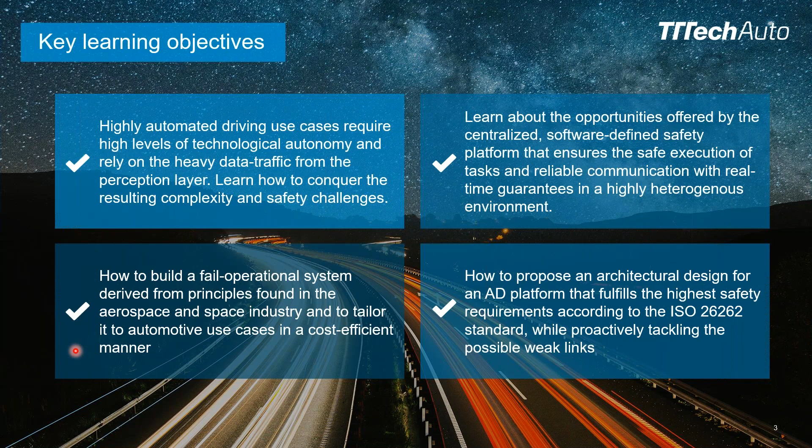So when we look at the automotive industry, and this is one of the slides that I think we have already shared in one of the previous webinars, so I'll just rush through this quickly. It is evolving at high speed, and I've been in the automotive industry for quite a while. There's really a speed going on right now. We are moving from one function, one box, to something like a complex modular design with a lot of services being centralized.

We are also seeing changes in the behavior of the OEMs, that they are cherry picking, they are selecting the best in class solution, and they want to get them from multiple different vendors, and they would not just choose one all-in-one supplier, but they want to have multiple different suppliers available to get the best solution.

And we are increasing the speed of innovation cycles, looking at the enormous complexity that we're putting in there. We are really speeding up the process of getting designs into the field. And of course, this still has to match with the overall timescales of the automotive world. But it is, of course, a race, and there is a competition going on here to be the first one to provide a safe and stable solution with a large customer value.

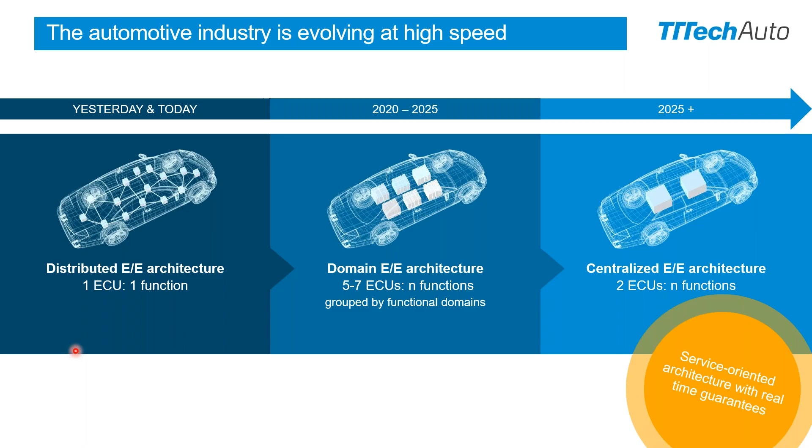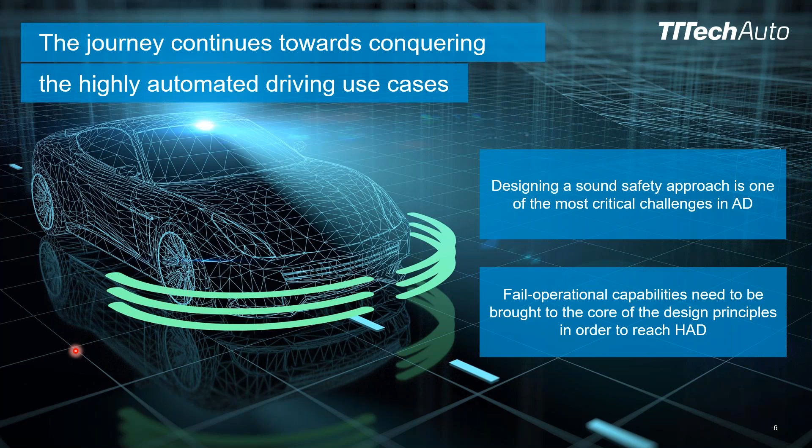And if we do this, we do need a service-oriented architecture that can also fulfill real-time guarantees. This whole transition of multiple functions into one very large compressed high-performance hardware will only work if we manage to get all services and all real-time needs under control. So when we are now looking into the use cases that we want to tackle, we of course need a really solid safety approach, and we also have to enter this new area of fail operational to reach highly automated driving, majorly because we are partially or completely removing the driver out of the loop.

So if we now focus on, let's call it hard facts determining complexity, we see all these sensors and all their diversity contributes to complexity. We also see a very high amount of information that needs to be passed between control units. We will have additional connectivity to the outside world. We heard about high definition maps. We heard about cloud connection. All these things need to be fed into this system as well. And we will have all kinds of clusters of applications running in parallel to do the navigation and the final controlling algorithms.

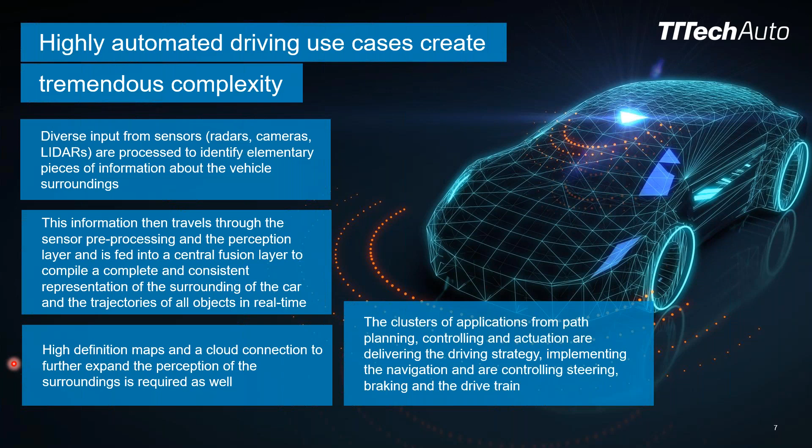So for me as a safety guy, I have to say complexity is one of the key challenges when we are trying to get safety well done. We really have to keep an eye on the complexity. And these challenges coming along with the sensors also means we will probably see multiple different combinations of sensors being used, because due to certain weaknesses of the one or the other, we will probably not see just a one-size-fits-all solution, but we will probably always see a combination of sensors, and this is the key to make it really usable and safe. And of course, the fusion of all these sensors is an important and challenging task, and it has real-time requirements as well.

So with a new architecture approach, we do also have some opportunities, and I think this is the part which has already been covered in detail in a previous webinar, so I'll really brush through it real quick. So one of the first things is boost of return of investment. We want our software to be written once and used through multiple projects, even if the hardware and everything changes. We want to have a seamless roadmap from certain degrees of automation to full automation in the future. We don't want to throw all this development work away and start all over again. We want to have some cost predictability, so we have to make sure that when we put it all together, we don't end up with unforeseeable additional efforts. And we have to have all these development and deployment risks under control with all the necessary defensive measures in place, like getting complexity down wherever possible and getting the real-time requirements really settled.

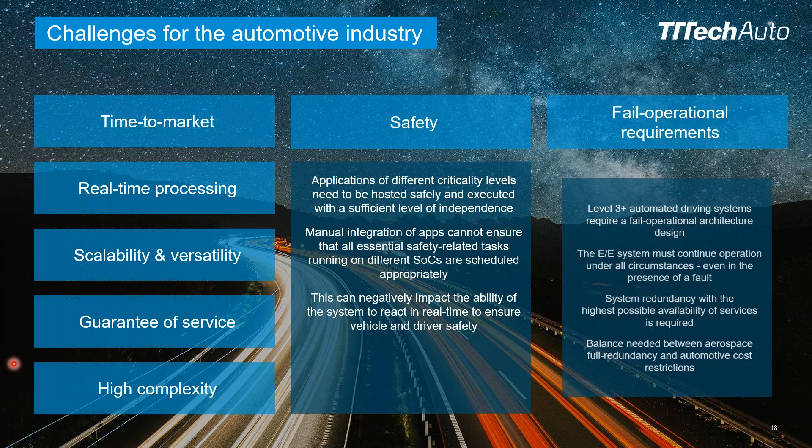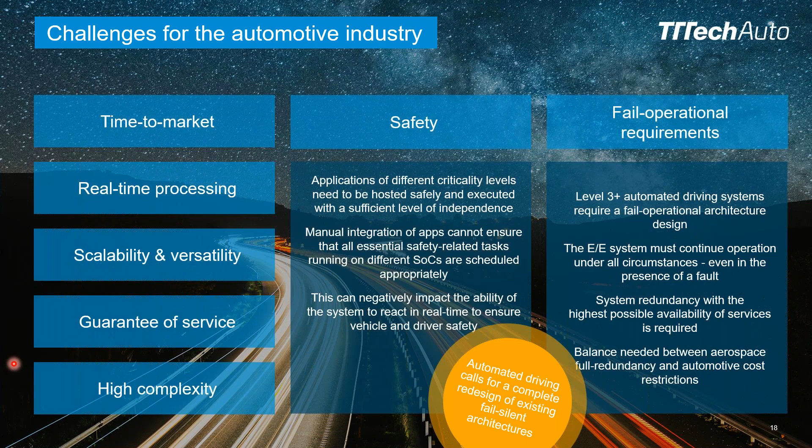Yeah, and we will enter this world of fail operational, and I will share some more slides on this, meaning that when we design the system, we always have to design it in such a way that even in presence of a fault, we can continue operation. And actually, this calls for a complete redesign of the existing fail-silent architectures, but we probably just don't have time for that. So we have to find a migration path from the fail-silent world to the fail operational ones.

And I think there is a hard barrier just between level 2 and level 3 of automation. So if I use the SAE classification here, we see a big jump actually in handing over responsibility from the driver to the electronic system, moving from level 2 to level 3. And this means we cannot rely on the driver as the fallback that will take over in all cases. We have to at least consider a certain takeover time for this driver. And even if it's only a few seconds, it will put a strong burden on the electronic system that even in presence of a fault, it can continue operation.

And I know these levels 0, 1, 2, 3, 4, 5 look like a very even staircase, but on the aspects of safety, we have a big jump between level 2 and level 3. We need to tackle the fail operational requirements, and that is a whole story on its own.

So to focus on the translation of what this means for the driver and for the system, I would like to point your attention to this line we call fallback here. Driver is the fallback, driver is the fallback. Here it starts, driver is the fallback after a certain takeover time. For defined use cases in level 4, the vehicle is the fallback and has to handle everything on its own. And for level 5, we don't even have to discuss. Yes, of course, the system has to handle all cases autonomously.

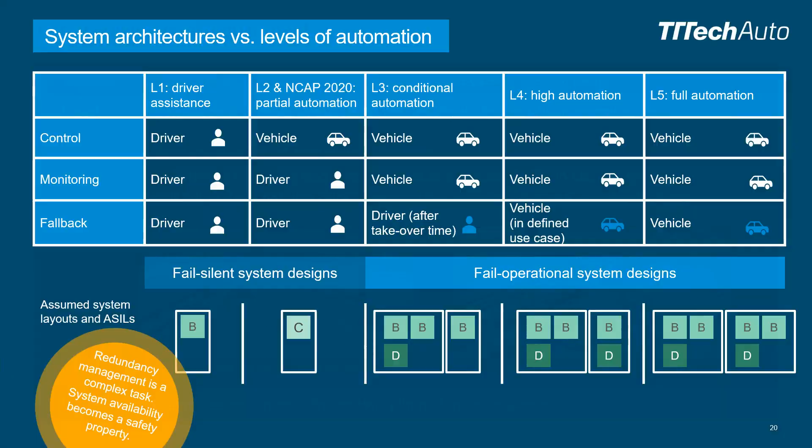So if we look at these level 3, level 4, level 5 use cases, what is the key aspect of really formulating a requirement resulting from fail operational? And I would say the most obvious case is if we enter the range of high speed and we are using a system like a highway pilot. In case of a fault, it will probably request takeover to the driver, but this will take some time. And during this time, it has to still be capable of at least a reduced level of operation. And even if the driver does not take over at all, it still has to perform some kind of reasonable continuation of the functionality.

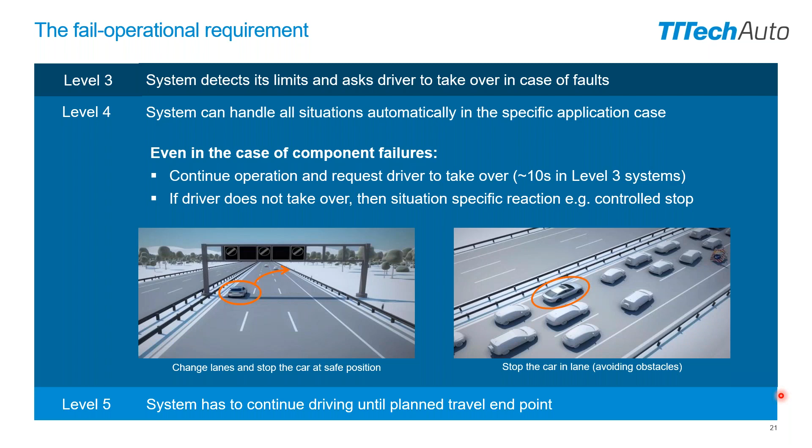And this is a big change to today's fail-silent systems, where you would get a red lamp indicating a certain system is not working, and the driver then has to be capable in the same second to handle maybe loss of steering assistance or things like that. And he can do that because he is the fallback himself. And of course, if we move to level 5, we're not talking about 10 seconds, we're talking about the whole mission time being available with this functionality.

So we talked about these challenges. Availability is now a big topic. We have to make sure the system stays available. Maybe this is achieved by using some redundant components. We also have to watch out that wherever we want to achieve a high ASIL level, we have to achieve this in combination with the fail-operational requirement.

So we cannot just always introduce a strict monitoring and switch to the safe state whenever it happens, because the safe state is not really safe anymore. The system has to stay capable for operation. And actually, we see additional challenges that the AI-based deep neural networks do not really have a clear safety argumentation for how we can justify that they are now safe and ready for release for public roads.

And we will need these redundant elements, and the vehicle architecture has to reflect the design principles to stay away from common cause faults like losing power. So we will have multiple power domains in the car, and we will have architectures that are to some extent separated and are capable to continue in a fallback mode, even if there's no driver that we can rely on.

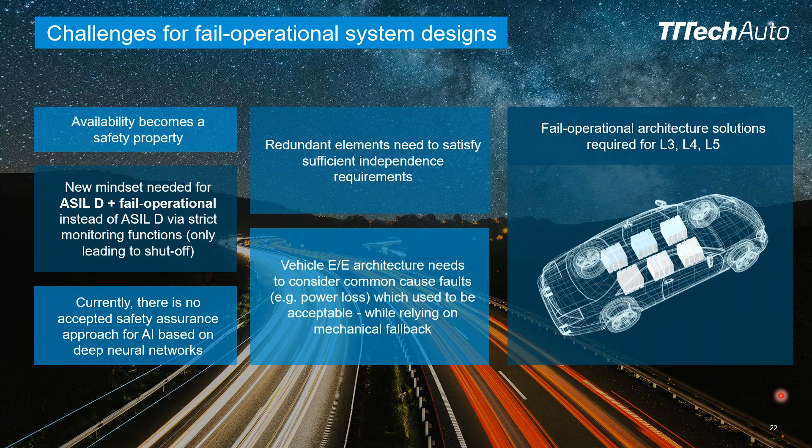So when we do this in the real-life environment, we will find out that faults can happen at an arbitrary complex situation, maybe a situation where normally driver handover would be requested immediately, like some unforeseen construction site, people on the highway running around, things like that.

So when we reach a certain speed, like highway speed, we're talking about 360 meters of travel that are covered in 10 seconds. And during this time, we cannot just blindly continue what we have been planning before. We have to actively react to other situations and other participants of the traffic. So we will have to have something like an active and a fallback system in place, and we will have to provide sufficient computation power on both of them to actively control the driving situation when moving on.

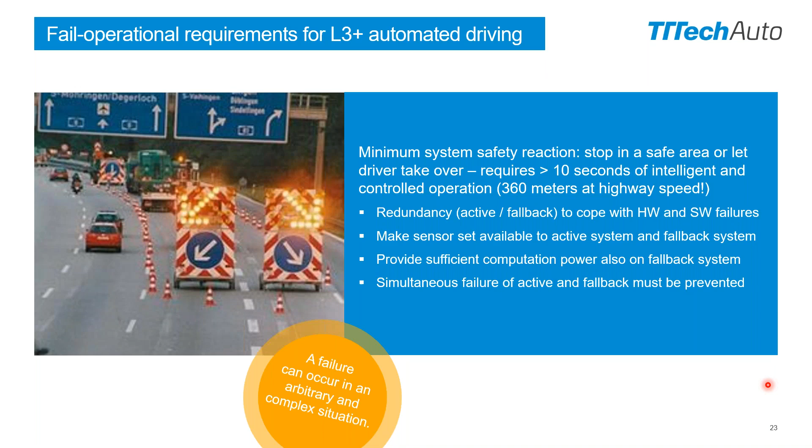So if we look at this as a cross-industry situation, you will see there are industries that are perfectly fine with fail-silent designs, and this can be nicely mapped to the different industries that we as a company, TTTech, are working in. For the off-highway market, fail-silent is perfectly fine. So in case of a fault, all the machine has to do is to stop and all dangers are gone. In the industrial world, we want to keep the availability of the system improved for availability reasons.

In automotive, we're now moving in this direction, fail-operational more and more. And in aerospace, of course, nobody is doubting that the aeroplane has to be fail-operational, and it's not acceptable in case of an electronic fault that the whole airplane will crash to the ground. No, it has to continue operation. And actually, we are heading in the same direction when we're going for autonomous driving with the automotive use case. So there is some cross-industry experience that we can rely on here inside TTTech. But as I said, we still have to adapt these things to the needs of the according market.

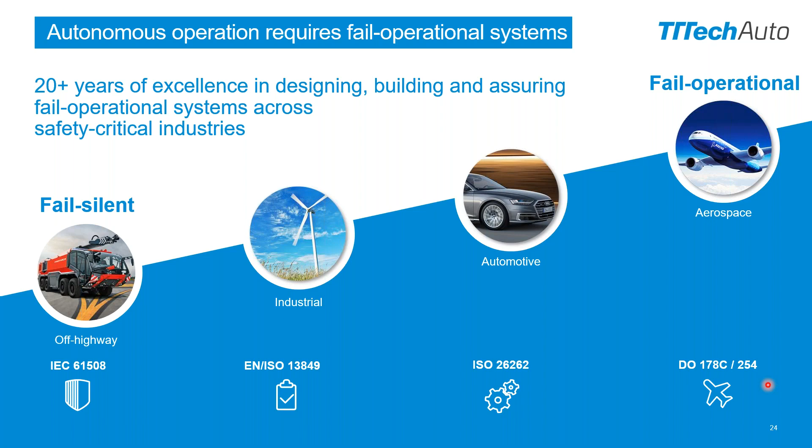So after talking about all this trouble, I would also like to talk about solutions. We do think we have some of the building blocks of these solutions in place to make really fit-for-purpose designs. So I tried to compress this into this slide by showing all these challenges we already talked about. I'm not going to repeat them. And we think the main building blocks of a good solution are, first of all, to have an open integration platform where you can pull all kinds of different software components together in a safe and controlled way.

You need to make it modular in the sense that this architecture that is built into the car can grow. It can range from small vehicles to large vehicles with more functionality. And no matter how complex the system is, we always have to make sure that the real-time capabilities are fulfilled. You could imagine a complex sensor evaluation that detects a pedestrian coming out on the street, appearing behind some obstacle.

If you have all the computation power to calculate it, but the result appears too late, you will probably already run over that pedestrian and you will not take the benefit of the electronic system detecting him. So you really have to make sure you not only detect him, but you also get him detected within a very strict time constraint. And the safety we want to claim for the overall end product has to be built in there by design from the very beginning.

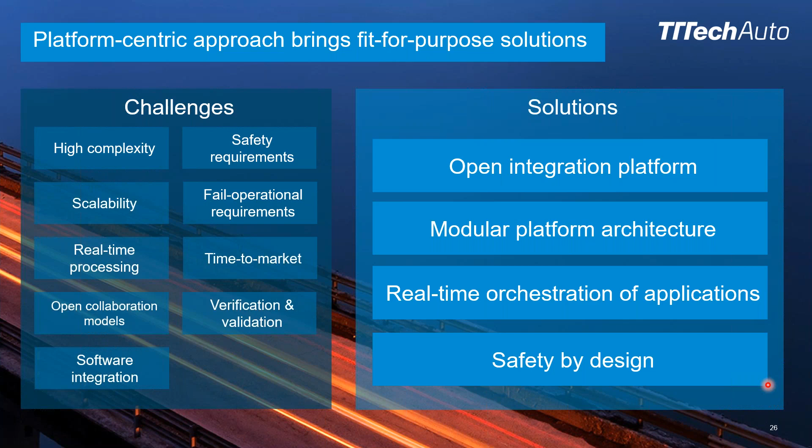So one of the solution elements is what we call real-time orchestration. So we need a deterministic behavior. We have to have guaranteed latencies, not only for the communication, but also for the execution of software. In the end, we want to provide end-to-end guarantees across a heterogeneous environment, from the sensors through the processing all the way through to the actuators. And in the end, these computation chains have to be very strictly designed and monitored during the development process.

So if you assume function 1 and function 2 to being deployed on a complex high-performance hardware, you will probably end up with these functions being split into different hosts. Maybe some safety-related functions go on the safety host. Other functions need high performance, go on performance host 1 or performance host n. And no matter how you distribute these functions, they will talk to each other using input and output messages, also intermediate messages, and you will need some kind of communication backbone to exchange this data.

In general, this is already well known, but we are moving this to a very high level of complexity now when we integrate many functions and also a lot of data flowing between them. And it's not enough just to put them there. We have to have the global scheduling, the end-to-end real-time guarantees, and this deterministic behavior that we can really rely on the results; we have to design this into there from the very beginning.

So in the end, we will end up with certain functions being swapped from one host to another, being moved around when the platform is reused for a new version with a different scaled performance level, for instance. And so we have to have the opportunity to use standardized APIs so we can reuse the application software developments when we move them across different hardware, or we advance from one performance host to another generation performance host in the future.

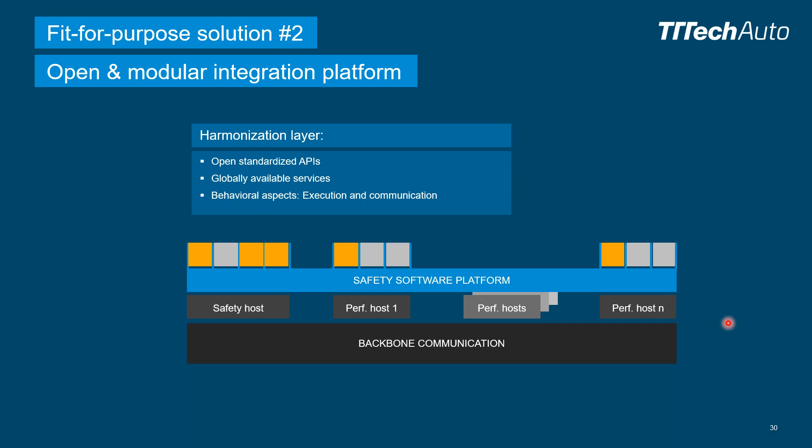So we do anticipate that sometimes the communication will be on a board internally in a control unit, but sometimes it will be separated on purpose. It will be hosted in a different control unit, separated from the others. So we have to have a solution where we can share this information across a communication backbone, even if they are physically separated. And of course, this just means that the concept of a safety platform has to consider these multiple different, let's call it, architectural layouts.

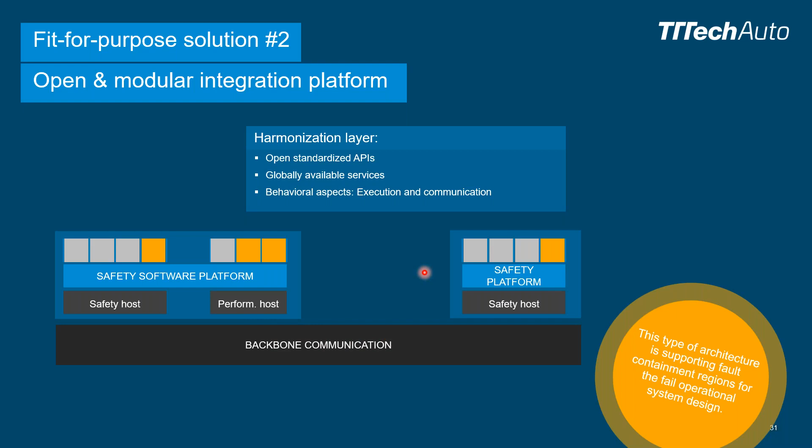And with this, we also support introducing fault containment regions to support the fail operational system designs, because you can imagine if you have a certain power supply supplying the high performance control unit over here, you will have to have a solution. What can you do in your vehicle if this power supply fails? And then you will probably argue, I have a second power supply and a separated control unit that will then take over this functionality. And of course, the communication backbone will then be limited, but it will still be available if it's not just based on one single pair of wires.

The third element of fit for purpose is what we call safety by design. So here, actually, all these building blocks that are well introduced in the ISO 26262, freedom from interference, designing according to high-level standards, following an ASIL-D compliant development process. All these things are necessary, and you also have to be capable to handle errors with the high ASIL level. So this is a big jump, actually, comparing fail-silent designs with the fail-operational ones, because now error handling is not just informative for some repair activity. Error handling is now a key property of ensuring the fail operational capability of the overall system.

So to do this, we are going to introduce barriers. This is not really new, but these barriers are, I think, the key element to get this freedom from interference done. And freedom from interference is actually quite a complex thing. It's not just based on timing alone. We have to make sure that we have the right timing in place for all the different bits and pieces of the application software that need to be executed, and also their communication need.

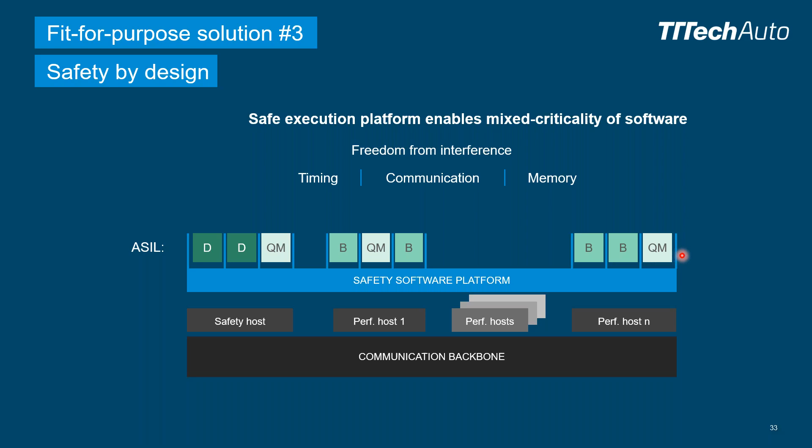We also have to have the memory that they use nicely separated, and we do want to use this memory also for exchange. So we need some kind of a smart way to keep the barriers in such a way that we get freedom from interference, but we do have an allowed exchange of data and flow of information through the safety software platform and the communication backbone that it uses.

Okay, and to really unleash the benefits of all these solutions, there's kind of the need now to talk about the product we call MotionWise, which is a highly modular scalable platform and has all these things already designed in there. And it is based on exactly these principles that I have just explained right now, including the safety by design. And it is developed following an ASIL D compliant safety development process.

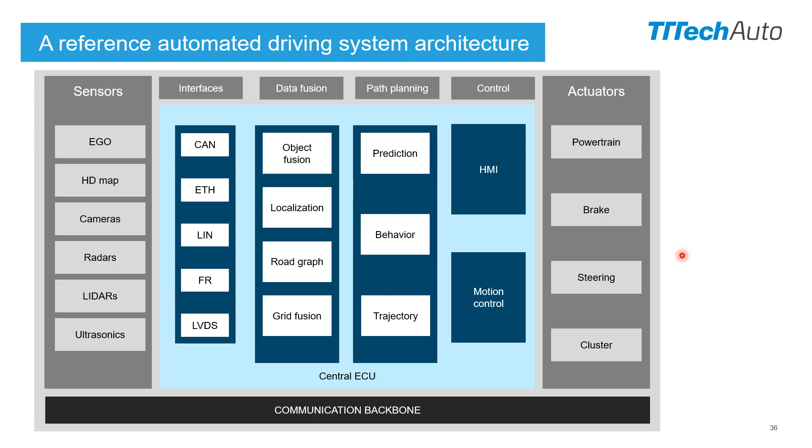So if we look at a reference architecture now a bit more concrete, what kind of sensors do we see? What kind of actuators are we going to control? What kind of functions are in there? We probably can expect there will be a lot of central processing going on in some kind of central ECU. Maybe this ECU will also be split into multiple ones, and we need a communication backbone to hold it all together. And I'll rush through these here because this is actually history. There used to be a time where there was a lot of glue code needed. Then some OEMs tried to reduce this.

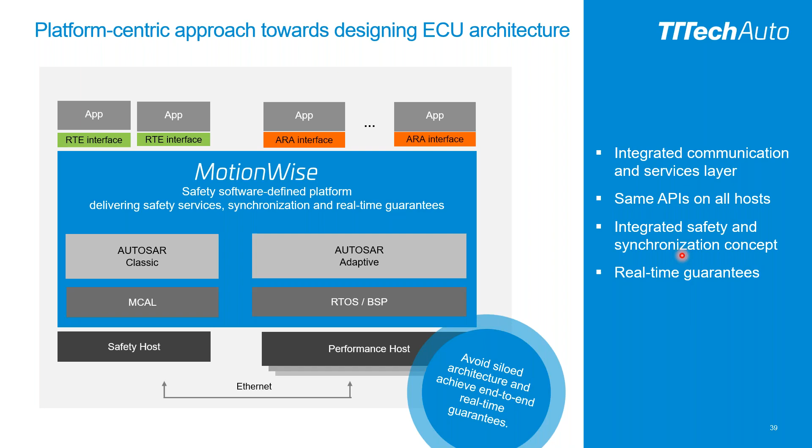What we are proposing is to use the MotionWise platform that is capable to handle the AUTOSAR Classic RTE interface and also the AUTOSAR Adaptive interfaces, and provide a platform that supports all these different APIs and still delivers real-time guarantees. So with real-time orchestration, safety by design, and open integration platform in there, we have, of course, developed all kinds of detailed building blocks inside.

I'm not going to try to present all of them here today, but we think this is the right kind of super operating system, let's call it this way, to orchestrate all this across multiple control units, multiple hosts, maybe separated across some different control units. And depending on the complexity in the sensors and the complexity in the actuators, there of course might also be a reason to integrate MotionWise into them.

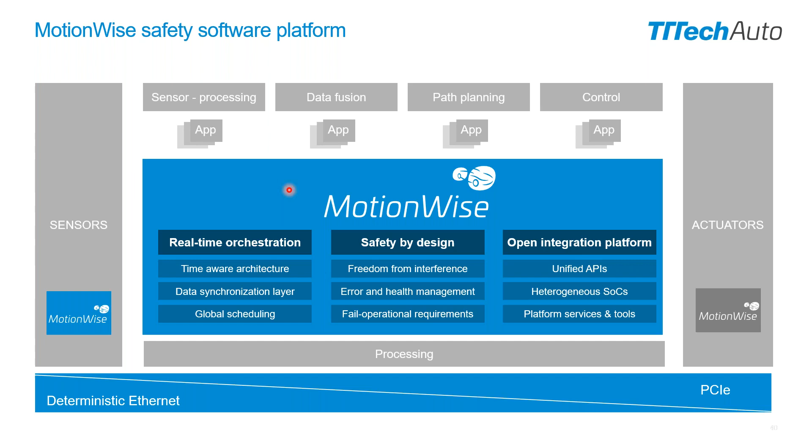Of course, if the sensor is, let's call it, just providing simple raw data, this does not really make much sense. But if there's a pre-processing activity there that needs to be nicely synchronized to the next step of processing, maybe here, like the data fusion, then it does make sense to synchronize this activity in a certain sense, and MotionWise is also capable for integration into multiple different hardware platforms.

So I'll really have to speed up now. So there's high performance computing. We expect safety and performance hosts side by side. And this is also reflected with the existing chips that we see. Maybe some of them already have combined the safety host and the performance host or cores inside one and the same chip. This does not counteract the concept. This actually supports the integration into even smaller hardware.

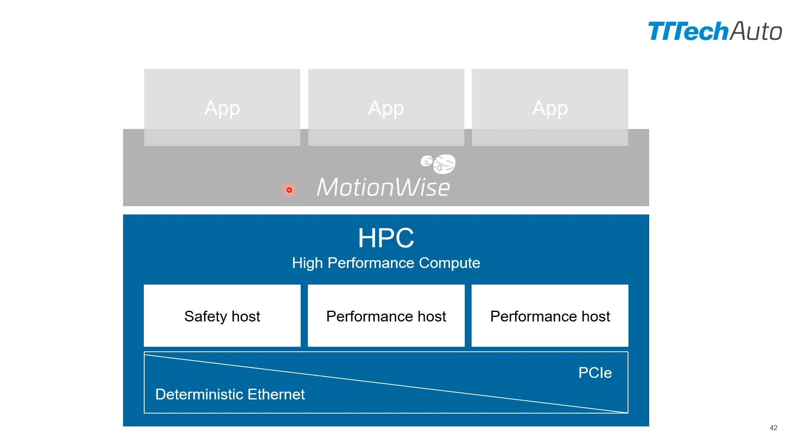But when we look inside MotionWise, we now have these three basic blocks in there. I'll start with the core. The core has scheduling services, communication services, time synchronization service, and what I would call safety and health services built inside. So this is actually nicely covering all these generic safety topics that we mentioned.

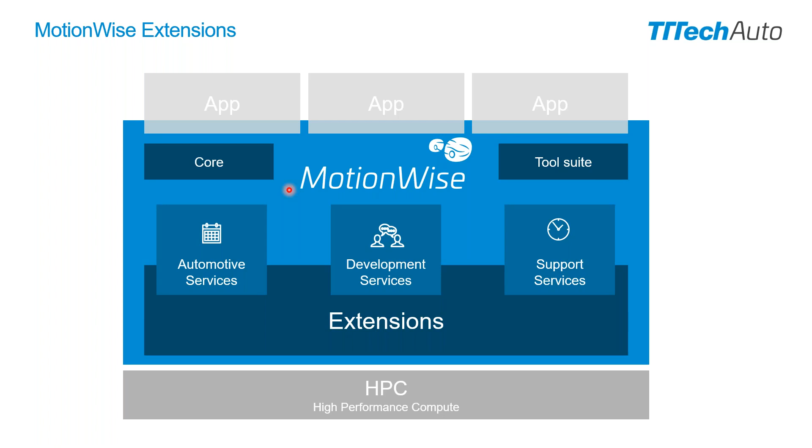We will also provide some extensions. Extensions can be things like automotive lifecycle management, logging and tracing, and things like that, or a black box recorder. These are parts that we call extensions that we also offer in this platform, and they make sense for the automotive use case. And of course, the whole thing also has to go with tools. So we're not only talking about the embedded part, we also need some tooling to create the software.

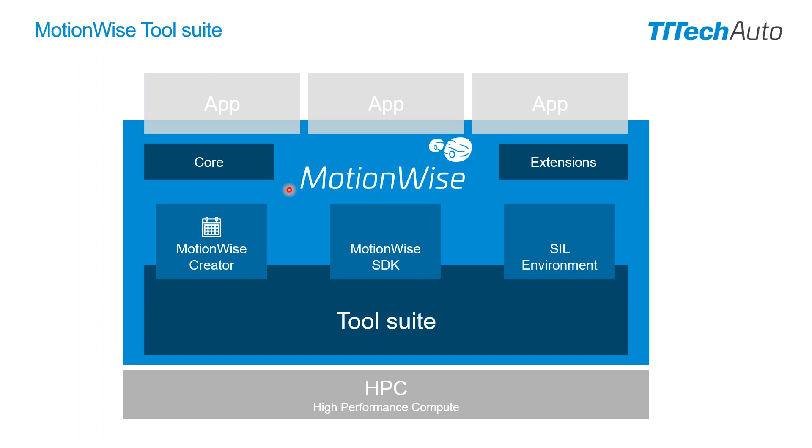We also have a software development kit that we offer so our customers can create their own complex system based on the MotionWise platform. And they, of course, also need a software-in-the-loop environment to be able to do their testing and simulation and all this. And of course, we support this with the right kind of software-in-the-loop library to execute these things on a PC, to speed up the development process.

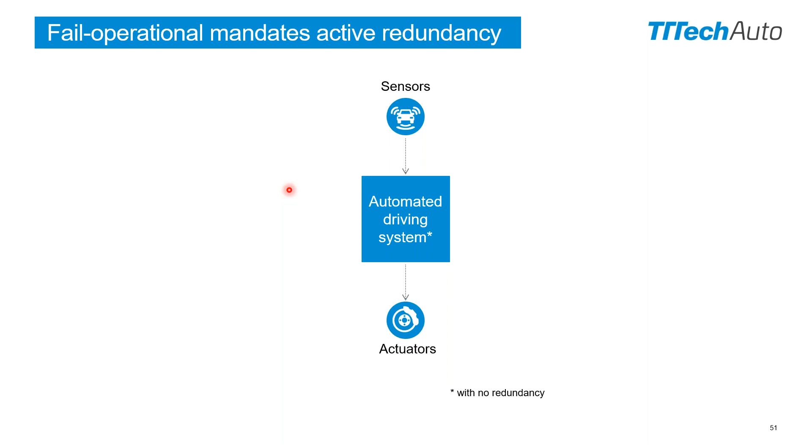So I'll rush into the fail operational topics now. The very simple view of the driving task we are doing is reading sensors, perform some kind of automated driving system, and then providing the outputs to the actuators. Now, this is just kind of the most abstract view I can think of to sketch this. But in a failure-free case, we expect this system to intelligently whirl around obstacles. But in a failure case, if it just stops working and continues driving at a high speed, just keeping in lane, this would be not acceptable.

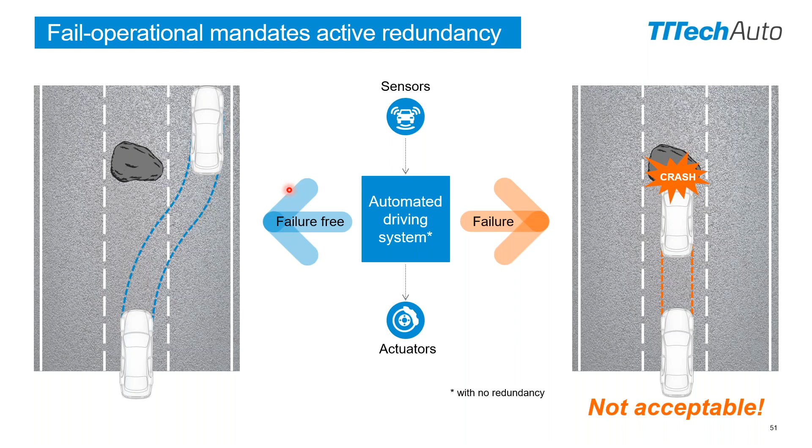So if we confess that this automated driving system can fail, we're actually in real trouble, because this will cost people their lives. They would get killed if the system would be built in this way without any redundancy. So the first idea is, okay, let's take two. Let's just take two of them, and then we run into a new problem that automated driving system 1 and automated driving system 2 might have a different view on how the correct driving trajectory looks like. Both of them are valid, but they don't agree.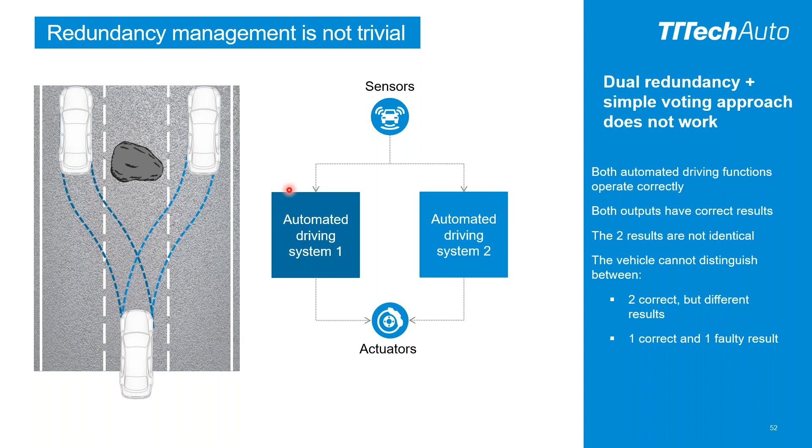So if we take two, we will end up with the problem that we just cannot do a simple voting. And even if we add a third one and say, let's do majority voting, we might run in trouble that in complex situations, we might even have three non-agreeing but all valid results. So we need a different model. We need something, I like to call this the happy marriage model. Happy marriage meaning, in a normal case, it's the active partner determining where to go. But if something goes wrong, there's a fallback. And if you're married, you probably know if you're the active or the fallback. So that's kind of different in every relation.

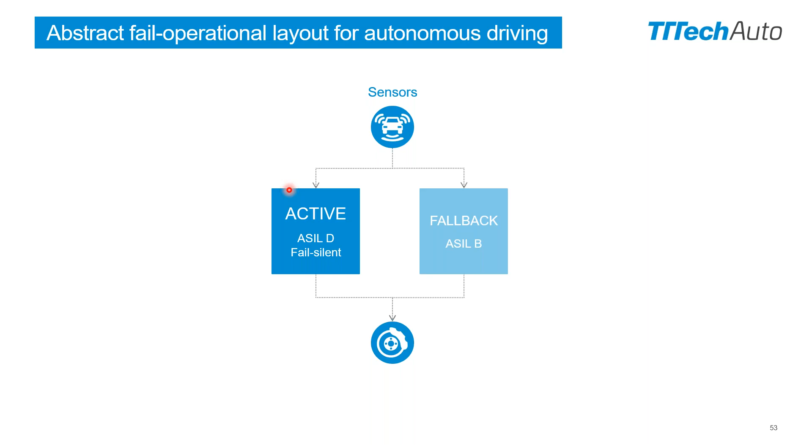But it has this general idea of, I have a complex activity done by the active control unit. And in case of a fault, I go to a more conservative fallback strategy. And I think this is a reasonable approach, and we can handle it with diverse cameras, diverse sensors. We can handle it with different driving algorithms on the active and on the fallback side. They would probably be less aggressive on the fallback side. And of course, when we come to the actuators, we will have some kind of redundancy there too, but I'm not focusing on that today. That is actually a topic that is well handled by the actuator suppliers today, and they are on their way to provide fail operational actuators.

But we will end up with this topic that there will be conflicting outputs coming from active and fallback. And one method to resolve this is to select first valid, meaning always take the active input and only if it's not available, take the one from fallback. So if we now look into the complex task of developing an automated driving system and bringing it to the highest ASIL level, ASIL-D, we actually need an additional ASIL-D decomposition inside this one active branch. And here again, the method of splitting it into two and just comparing if they're calculating the same result will not work. So this symmetric approach is not feasible. It will not work. It will fail.

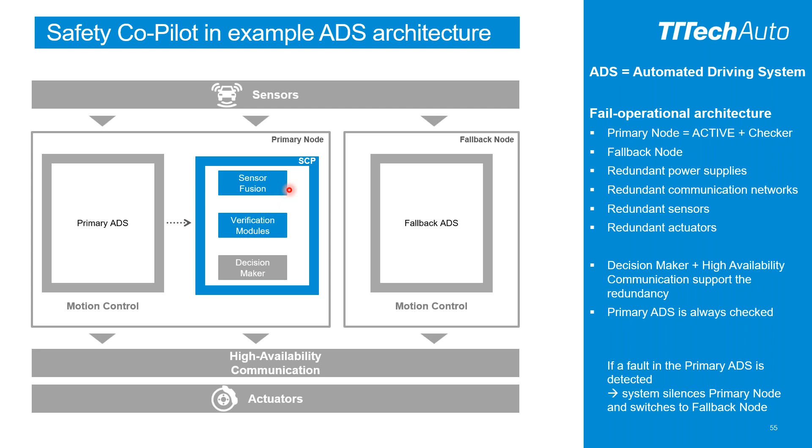It does make sense to develop the safety copilot to just do verification of these outputs and use the benefit to make it a bit simpler and a bit different, and with this diversity, get correctness on the outputs. So that's the general idea here.

So if we look at our MotionWise platform, we are now actually talking about an application module on top of the MotionWise platform that I would call the safety copilot, or you might call the checker. Sorry for this disturbance here. So inside the safety copilot, we will have a kind of sensor processing and sensor fusion. Maybe it will be a bit simplified compared to the full primary system. We will have verification modules and a decision maker in there. And we're working on this.

And we think this is a valuable extension to our platform and can be used to not only benefit from this ASIL decomposition and offload the high ASIL level from the primary automated driving system development, but also to get a good safety argument in the overall safety case in the end. Okay, so what we want to achieve with this is to get the correct behavior out of this highly complex primary

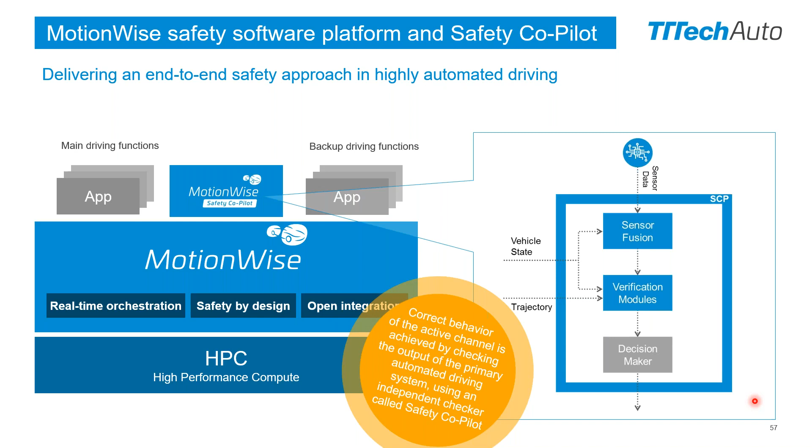driving system. So we think this is also a seamless roadmap to full automation in the future, and also into further integration on the hardware level with in-car compute platforms coming along. So just to give you a rough idea, we do expect that there will be, let's call it smart IOs inside the vehicle, doing the actuation, doing maybe also the sensing. But we will end up with some high performance in-car compute platforms, probably two of them in the vehicle, doing a whole variety of software implemented functions.

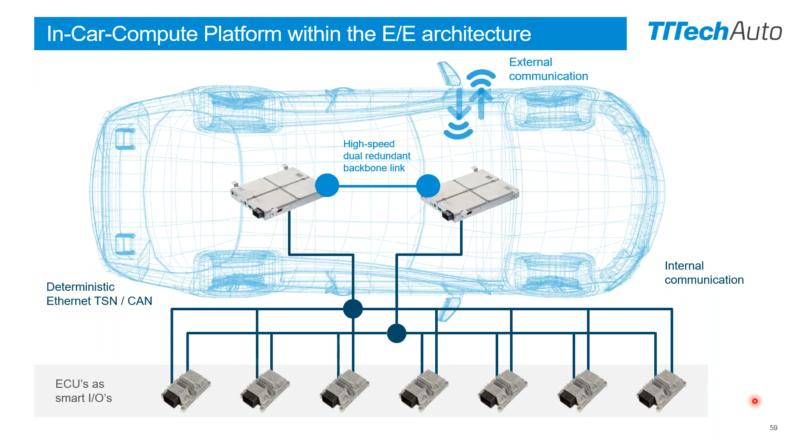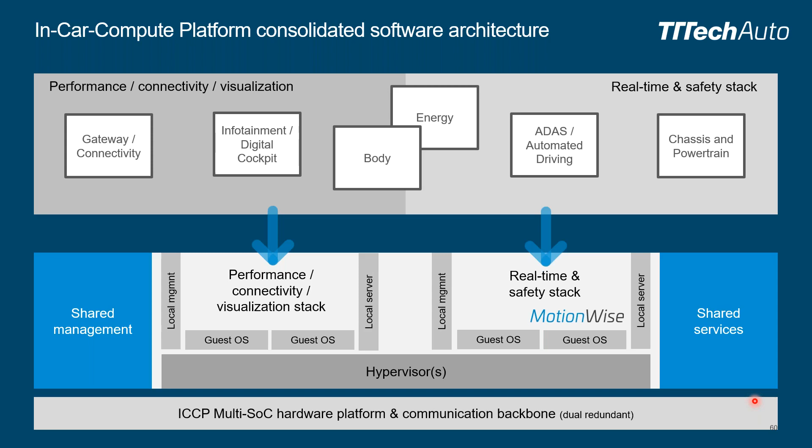And of course, they have all the requirements of handling this internally in the vehicle, but also communication to the outside world. So if we look inside, we see that we have different worlds coming into this same in-car compute platform. We have what I would call the connectivity, infotainment, visualization stuff, but also the hard real-time safety-related stuff. And we will have to find a way to host all this on the compute platform with sufficient independence between them and ensuring freedom from interference, so these mixed criticality levels of functionality can be executed, all sharing the same high performance computation platform and also a communication backbone.

So in the end, with MotionWise and the safety copilot, I think we have some nice benefits that we can point out. We have all these safety mechanisms in there that are suitable for the sophisticated redundancy needs that we have when we're moving towards fail operational. We have the design ongoing and already fulfilled to a large extent with ISO 26262 ASIL D compliance. And this supports also ASIL decomposition in the application software, especially to get the ASIL level down to an ASIL B from D and another ASIL B from D. So you can that way reduce the ASIL level for the individual parts of the application software.

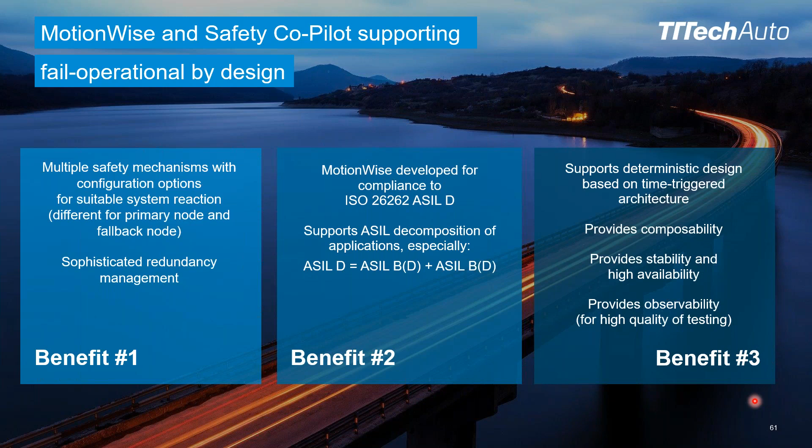And of course, it supports a deterministic time-triggered architecture, because that's exactly the key element of our operation inside this company. And it is majorly influenced by the aerospace industry, but it is applicable to the hard real-time world of automotive just as well.

So it helps our customers, organizations, to get away from slow and costly development into a quick integration process. No surprises when integrating the software because they're nicely separated. This is a key element of speeding up the development process. And together with the co-pilot, we get an end-to-end safety approach available.